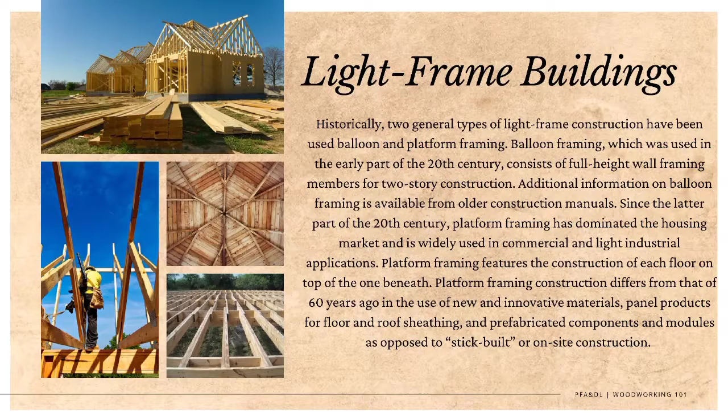Since the latter part of the 20th century, platform framing has dominated the housing market and is widely used in commercial and light industrial applications. Platform framing features the construction of each floor on top of the one beneath. It differs from the practice of 60 years ago in its use of new and innovative materials, panel products for floor and roof sheathing, and prefabricated components and modules as opposed to stick-built or on-site construction.

Foundation. Light frame buildings with basements are typically supported on cast-in-place concrete walls or concrete block walls supported by footings. This type of construction with a basement is common in northern climates.

Another practice is to have a concrete block foundation extend a short distance above ground to support a floor system over a crawl space. In southern and western climates, some buildings have no foundation; the walls are supported by a concrete slab, thus having no basement or crawl space.

Treated wood is also used for basement foundation walls. Basically, such foundations consist of wood frame wall sections with studs and plywood sheathing supported on treated wood plates, all of which are preservative treated to a specified level of protection. To distribute the load, the plates are laid on a layer of crushed stone or gravel.

Walls, which must be designed to resist the lateral loads of the backfill, are built using the same technique as conventional walls. The exterior surface of the foundation wall below grade is draped with a continuous moisture barrier to prevent direct water contact with the wall panels.

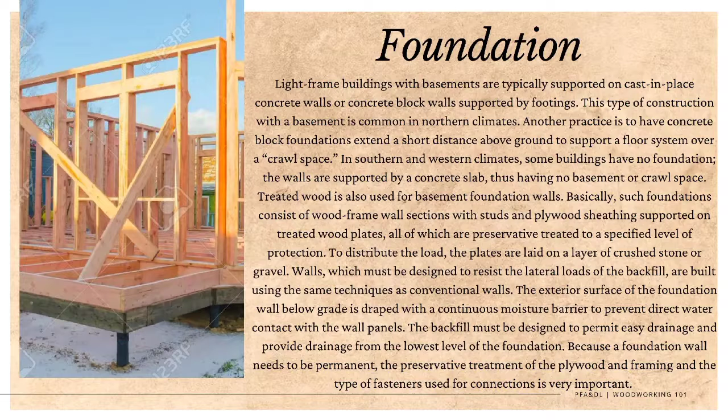The backfill must be designed to permit easy drainage and provide drainage from the lowest level of the foundation. Because the foundation wall needs to be permanent, the preservative treatment of the plywood and framing and the type of fastener used for the connection is very important.

Floor. For houses with basements, the central supporting structure may consist of wood posts on suitable footings that carry a built-up girder, frequently composed of planks the same width as the joists — standard 38 by 184 mm to 38 by 286 mm, nominal 2 by 8 inch to 2 by 12 inch — face nailed together and set on edge.

Because planks are seldom sufficiently long to span the full length of the beam, butt joints are required in the layers, staggered in the individual layers near the column support. The girder may also be a glulam beam or a steel I-beam, often supported on adjustable steel pipe columns. Similar details may be applied to a house over a crawl space.

The floor framing on a residential structure typically consists of wood joists on 400 or 600 mm, 16 or 24 inch centers, supported by a foundation wall and the center girder. Joist size depends on the anticipated loading, spacing between joists, the distance between supports or span, and the species and grade of the lumber.

Commonly used joists are standard 38 by 184 mm or 38 by 235 mm, nominal 2 by 8 inch or 2 by 10 inch lumber, prefabricated wood I-joists, or parallel chord trusses. Lumber joists typically span from 3.6 to 4.8 meters, or 12 to 16 feet.

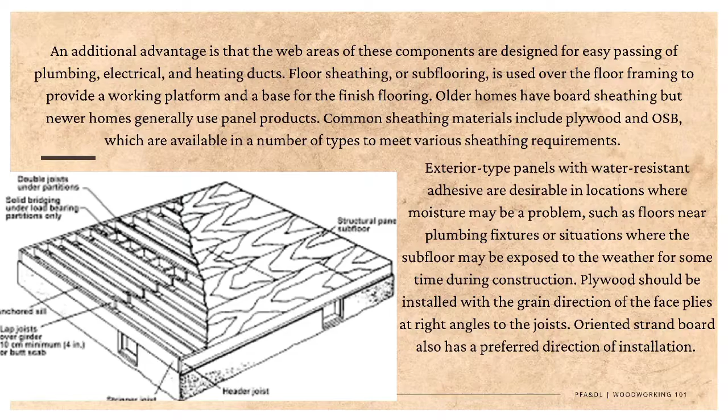Exterior walls of light frame structures are generally load bearing. They support upper floors and the roof. An exception is the gable ends of a one or two-story building.

Basically, wall framing consists of vertical studs and horizontal members, including top and bottom plates and headers or lintels over window and door openings. The studs are generally standard 38 by 89 mm, 38 by 114 mm, or 38 by 140 mm, nominal 2 by 4 inch, 2 by 5 inch, or 2 by 6 inch members, spaced between 300 and 600 mm, 12 and 24 inch on center.

The selection of the size depends on the load the wall will carry, the need for support of wall covering materials, and the need for insulation thickness in the walls.

Headers over openings up to 1.2 meters or 4 feet are often 38 by 140 millimeters or 2 by 6 inch, nailed together face to face with spacers to bring the headers flush with the face of the stud. Special headers that match the wall thickness are also available in the form of either prefabricated I-joists or structural composite lumber.

Wall framing is erected over the platform formed by the first floor joists and subfloor. In most cases, an entire wall is framed in a horizontal position on the subfloor, then tilted into place.

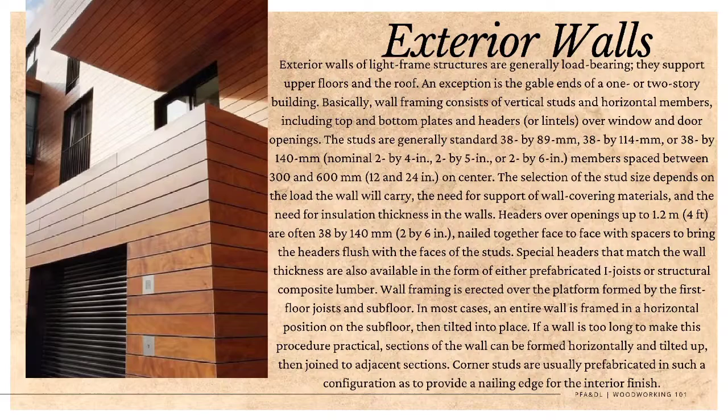Corner studs are usually prefabricated in such a configuration as to provide a nailing edge for the interior finish. Studs are sometimes doubled at the points of intersection with an interior partition to provide backup support for the interior wall finish.

Alternatively, a horizontal block is placed mid-height between exterior studs to support the partition wall. In such a case, backup clips on the partition stud are needed to accommodate the interior finish.

Upper plates are usually doubled, especially when rafters or floor joists will bear on the top plate between studs. The second top plate is added in such a way that it overlaps the first plate at corners and interior wall intersections. This provides a tie and additional rigidity between the wall, floor framing, and sill plate, which should be anchored to the foundation.

If a second story is added to the structure, the edge floor joist is nailed to the top wall plate and subfloor, and wall framing is added in the same way as the first floor.

Sheathing for the exterior wall is commonly some type of panel product. Here again, plywood or OSB may be used. Fiberboard that has been treated to impart some degree of water resistance is another option. Several types of fiberboard are available.

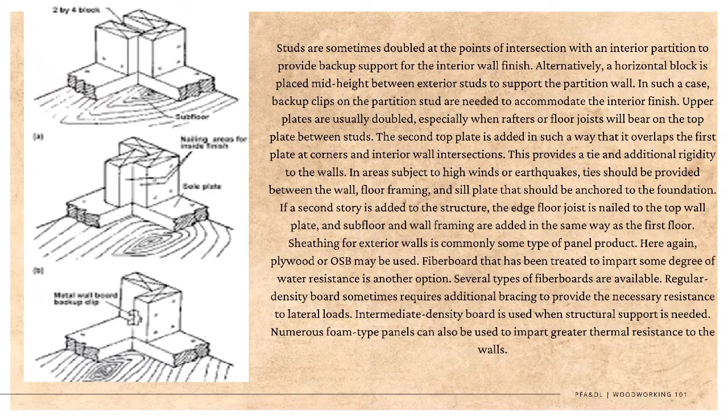Regular density boards sometimes require additional bracing to provide the necessary resistance to lateral loads. Intermediate density board is used when structural support is needed. Numerous foam-type panels can also be used to impart greater thermal resistance to the walls.

Ceiling and roof: Roof systems are generally made of either the joist and rafter system or trusses. Engineered trusses reduce on-site labor and can span greater distances without intermediate support, thus eliminating the need for interior load-carrying partitions. This provides greater flexibility in the layout of interior walls.

Prefabricated roof trusses are used to form the ceiling and sloped roofs of more than two-thirds of current light frame buildings.

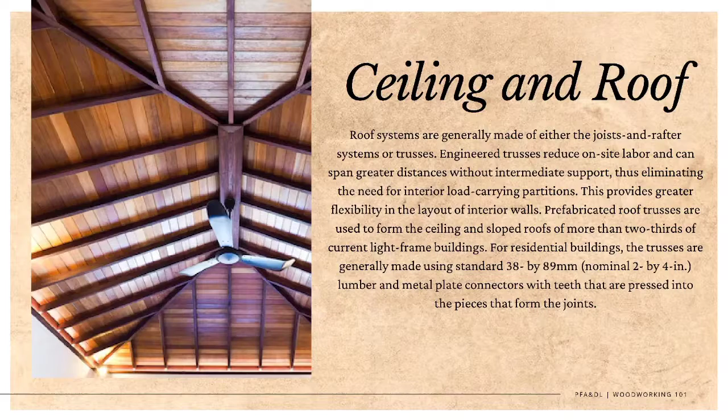For residential buildings, the trusses are generally made using standard 38 by 89 mm or nominal 2 by 4 inch lumber and metal plate connectors with teeth that are pressed into the pieces that form the joints.

Joist and rafter systems are found in most buildings constructed prior to 1950. Rafters are generally supported on the top plate of the wall and attached to a ridge board at the roof peak. However, because the rafters slope, they tend to push out the tops of the wall.

This is prevented by nailing the rafters to the ceiling joists and nailing the ceiling joists to the top wall plates. A valley or hip is formed where two roof sections meet perpendicular to each other.

A valley rafter is used to support short-length jack rafters that are nailed to the valley rafter and the ridge board. In some cases, the roof does not extend to a gable end, but is sloped from some point down to the end wall to form a hip.

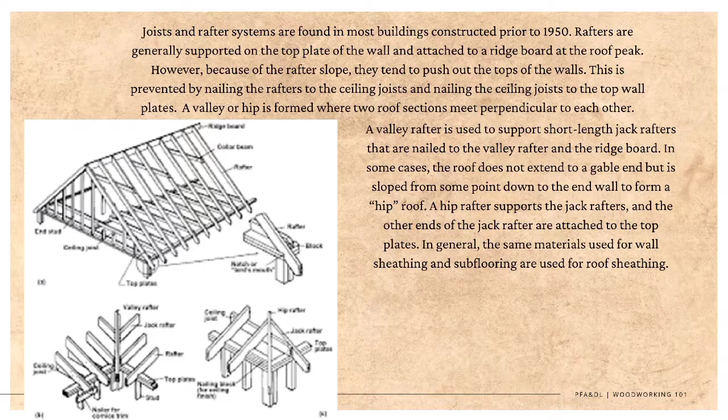Hip rafters support the jack rafters, and the other ends of the jack rafters are attached to the top plates. In general, the same materials used for the wall sheathing and subflooring are used for the roof sheathing.

Wood deck: A popular method of expanding the living area of a home is to build a wood deck adjacent to one of the exterior walls. Decks are made of preservative-treated lumber, which is generally available from local building supply dealers.

Depending upon the complexity, a deck may be built by the do-it-yourselfer. To ensure long life, acceptable appearance, and structural safety, several important guidelines should be followed.

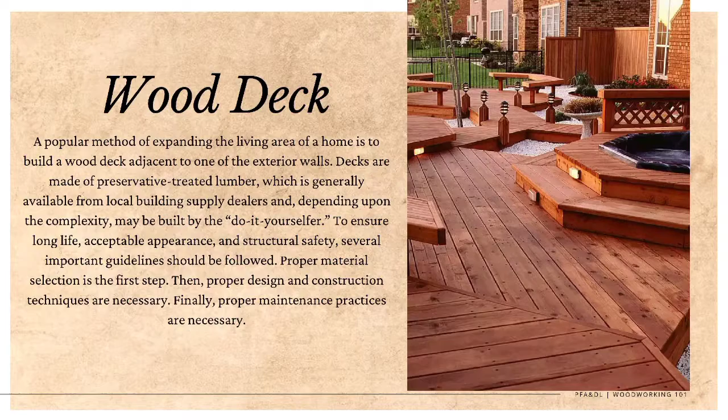Proper material selection is the first step, then proper design and construction techniques are necessary. Finally, proper maintenance practices are necessary.

Post frame and pole buildings. In post frame and pole buildings, round poles or rectangular posts serve both as the foundation and the principal vertical frame element. This type of construction was known as pole buildings, but today, with extensive use of posts, is commonly referred to as post frame construction.

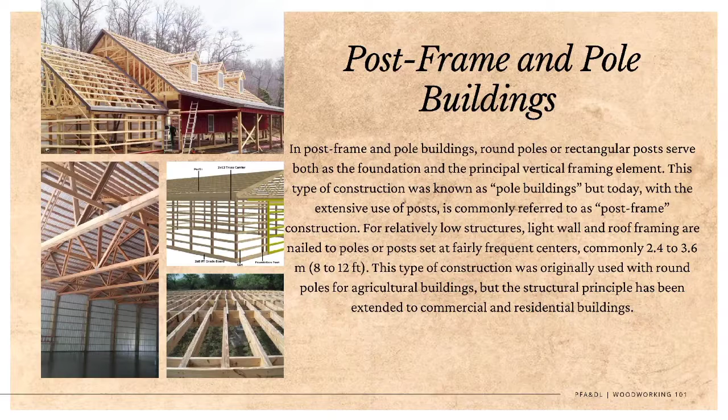For relatively low structures, light wall and roof framing are nailed to poles or posts set at fairly frequent centers, commonly 2.4 to 3.6 meters or 8 to 12 feet. This type of construction was originally used with round poles for agricultural buildings, but the structural principle has been extended to commercial and residential buildings.

Round poles present some problems for connecting frame members. These problems can be eased by slabbing the outer face of the pole. For corner poles, two faces may be slabbed at right angles. This permits better attachment of both light and heavy framing by nails or timber connectors. When the pole is left round, the outer face may be notched to provide seats for beams.

Rectangular posts are the most commonly used and may be solid sawn, glue laminated, or built up by nail laminating. Built-up posts are advantageous because only the base of the post must be preservative treated. The treated portion in the ground may have laminations of various lengths that are matched with the lengths of untreated laminations in the upper part of the post. The design of these types of posts must consider the integrity of the splice between the treated and untreated lumber.

The wall systems consist of horizontal girts, often covered with a light gauge metal that provides some degree of racking resistance. Roof trusses made with metal connectors are attached to each pole or post. Roof purlins are installed perpendicular to the trusses at spacing from 1.2 to 3.7 meters or 4 to 12 feet, with 2.4 meters or 8 feet as common spacing.

For 2.4 meter, 8 foot truss spacing, these purlins are often standard 38 by 89 mm or nominal 2 by 4 inch, spaced on 0.6 meter or 2 foot centers, and attached to either the top of the trusses or between the trusses using joist hangers.

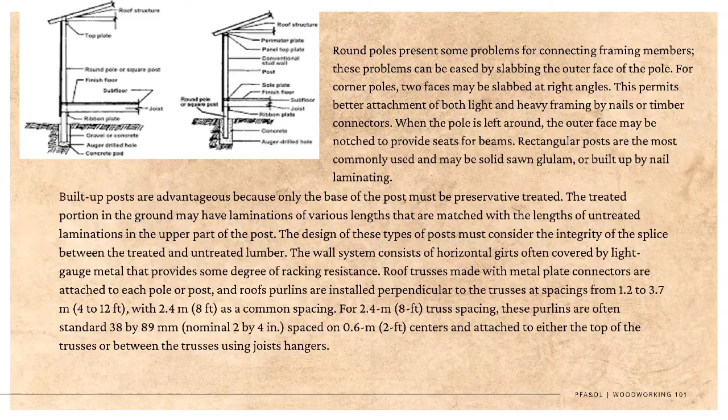Log buildings. Interest is growing in log houses, from small, simple houses for vacation use to large, permanent residences. Many US firms specialize in the design and materials for log houses. Log houses nearly always feature wall systems built from natural or manufactured logs rather than from dimensional lumber. Roof and floor systems may also be built with logs or conventional framing.

Log house companies tend to categorize log types in two systems: round and shape. In the round log system, the logs are machined to a smooth, fully rounded surface and are generally all the same diameter. In the shape system, the logs are machined to specified shapes, generally not fully round. The exterior surfaces of the logs are generally rounded, but the interior surface may be either flat or round. The interface between logs is machined to form an interlocking joint.

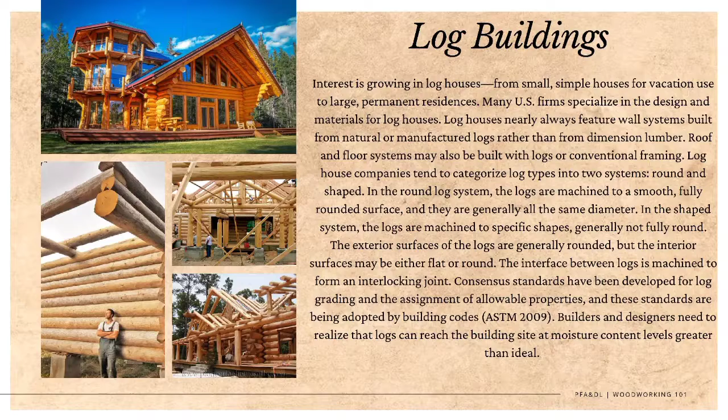Consensus standards have been developed for log grading and assignment of allowable properties, and these standards are being adopted by building codes (ASTM 2009). Builders and designers need to realize that logs can reach the building sites at moisture content levels greater than ideal.

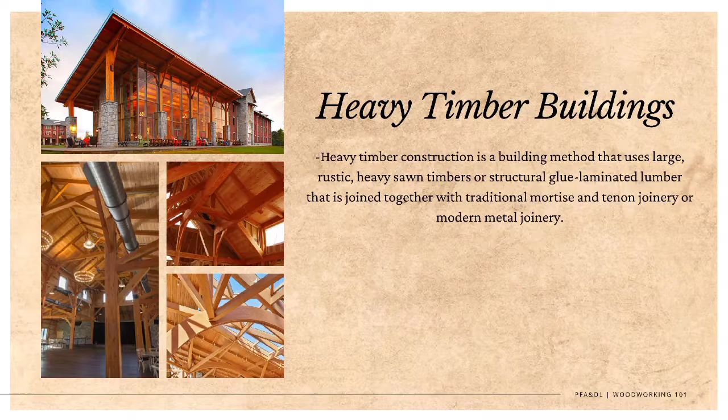Heavy timber buildings. Heavy timber construction is a building method that uses large, rustic, heavy sawn timbers or structural glue laminated lumber that is joined together with traditional mortise and tenon joinery or modern metal joinery.

Timber frame. Timber frame houses were common in early America and are enjoying some renewed popularity today. Most barns and factory buildings dating prior to the middle of the 20th century were heavy timber frames. The traditional timber frame is made of large sawn timbers, larger than 114 by 114 millimeters or 5 by 5 inches, connected to one another by hand fabricated joints, such as mortise and tenon. The construction of such a frame involves rather sophisticated joinery as illustrated.

In today's timber frame homes, a prefabricated composite sheathing panel, 1.2 by 2.4 meters or 4 by 8 feet, is frequently applied directly to the frame. This panel may consist of an inside layer of 13 millimeter or 1/2 inch gypsum, a core layer of rigid foam insulation, and an outside layer of exterior plywood or OSB. Finished siding is applied over the composite panel.

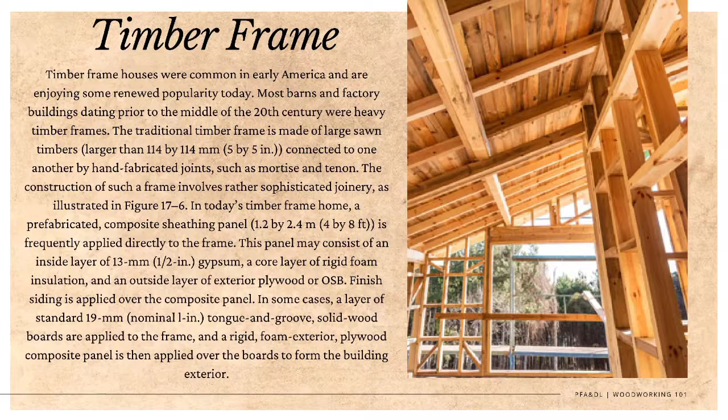In some cases, a layer of standard 19 millimeter or nominal 1 inch tongue and groove solid wood boards is applied to the frame, and a rigid foam exterior plywood composite panel is then applied over the boards to form the building exterior. Mill type construction.

Mill type construction uses timbers of large cross sections with columns spaced in a grid according to the available lengths of beam and girder timbers. The size of the timbers makes this type of construction resistant to fire. The good insulating qualities of wood, as well as the char that develops during fire, results in slow penetration of fire into large members.

Thus, the members retain a large proportion of the original load carrying capacity and stiffness for a relatively long period after the onset of fire.

To be recognized as mill-type construction, the structural element must meet specific size requirements. Columns cannot be less than standard 184 millimeter, or nominal 8 inches, in dimensions, and beams and girders cannot be less than standard 140 by 235 millimeter, or nominal 6 by 10 inch, in cross-section. Other limitations must be observed as well.

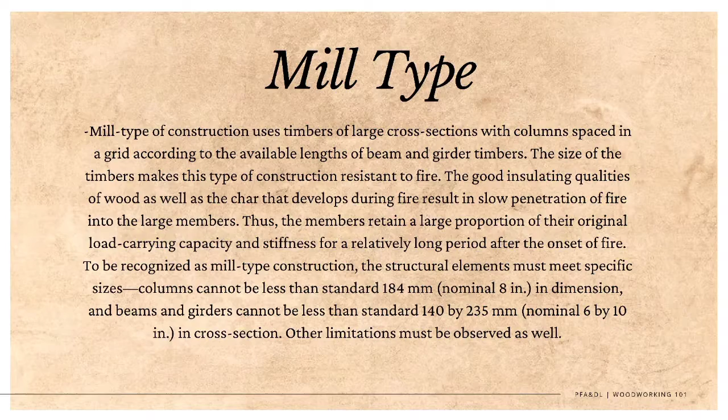Glulam beam. This system is based on supporting columns located at the corners of pre-established grids. The main glulam beams support purlins, which may be sawn timbers, glulam parallel chord trusses, or prefabricated wood I-joists. These purlins, normally at 2.4 meter or 8 feet centers, support pre-framed structural panels.

The basic unit of the pre-framed system is 1.2 by 2.4 meters, or 4 by 8 feet. Structural panels are nailed to standard 38 by 89 millimeter or 38 by 140 millimeter, nominal 2 by 4 inch or 2 by 6 inch, stiffeners, or sub-purlins. These stiffeners run parallel to the 2.4 meter or 8 feet dimension of the structural panel.

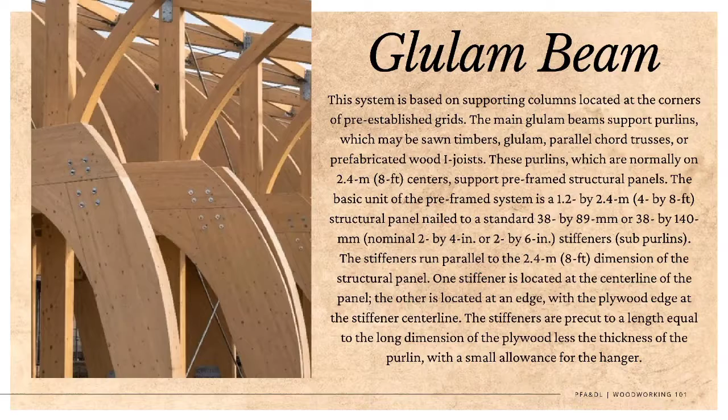One stiffener is located at the center line of the panel. The other is located at the edge, with the plywood edge at the stiffener center line. The stiffeners are pre-cut to a length equal to the long dimension of the plywood, less the thickness of the purlin, with a small allowance for the hanger.

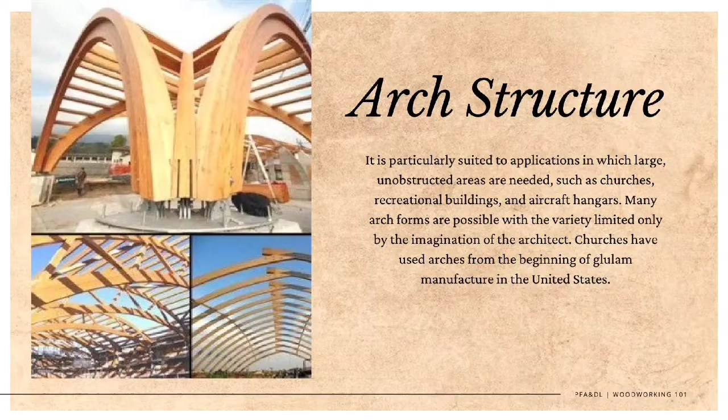Arch structures. These are particularly suited to applications in which large, unobstructed areas are needed, such as churches, recreational buildings, and aircraft hangars. Many arch forms are possible, with a variety limited only by the imagination of the architects. Churches have used arches from the beginning of glulam manufacture in the United States.

Dome. Radial rib domes consist of curved members extending from the base ring, or tension ring, to a compression ring at the top of the dome, along with other ring members at various elevations between the tension and compression rings. The ring members may be curved or straight.

If they are curved to the same radius as the rib and have their centers at the center of the sphere, the dome will have a spherical surface. If the ring members are straight, the dome will have an umbrella look. Connections between the ribs and other ring members are critical because of the high compressive loads in the ring members.

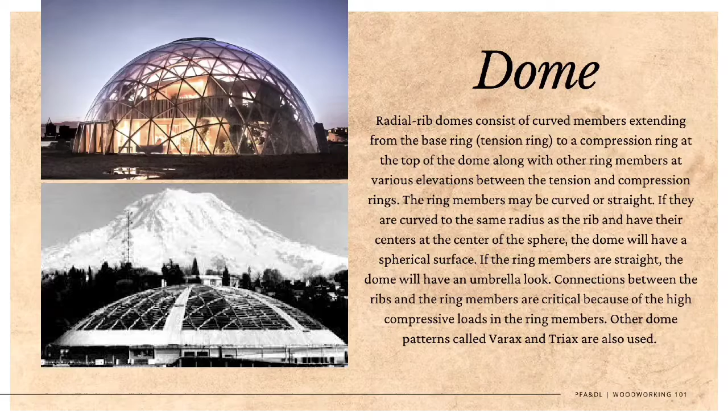Other dome patterns, called Varax and Triax, are also used.

Timber bridges. Prior to the 20th century, timber was the major material used for both highway and railroad bridges. The development of steel and reinforced concrete provided other options, and these have become the major bridge building materials. However, the U.S. inventory does contain a substantial number of timber bridges, many of which continue to carry loads beyond their design life. A recent initiative in the United States has focused research and technology transfer efforts on improving the design and performance of timber bridges.

As a result, hundreds of timber highway bridges were built across the United States during the past several years, many using innovative designs and materials.

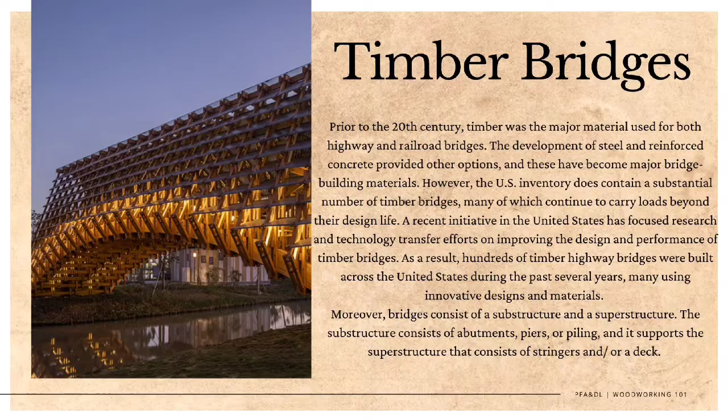Moreover, bridges consist of a substructure and a superstructure. The substructure consists of abutments, piers, or piling, and it supports the superstructure that consists of stringers and/or a deck.

Log stringer. A simple bridge type that has been used for centuries consists of one or more logs used to span the opening. Several logs may be laid side by side and fastened together. The log stringer bridge has been used to access logging areas and is advantageous when adequate sized logs are available and the bridge is needed for only a short time. Unless built with durable species, the lifespan of a log stringer bridge is usually limited to less than 10 years.

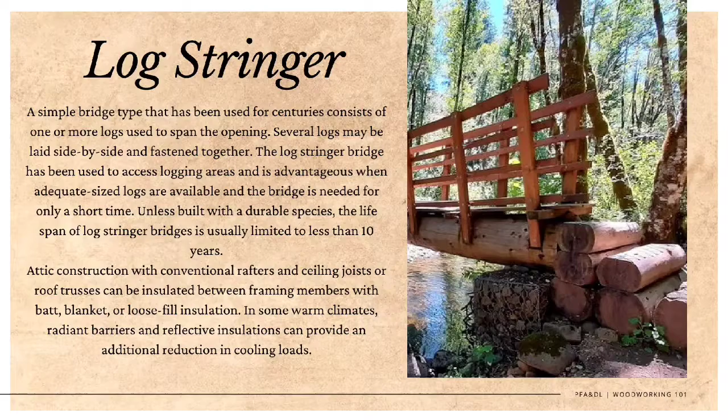Attic construction with conventional rafters and ceiling joists, or roof trusses, can be insulated between framing members with batt, blanket, or loose fill insulation. In some warm climates, radiant barriers and reflective insulation can provide an additional reduction in cooling loads.

Sawn lumber. Several types of bridges can be built with sawn lumber. Even though the span is usually limited to about 9 meters or 30 feet, because of the limited size of the lumber available, this span length entails the majority of timber bridges in the United States.

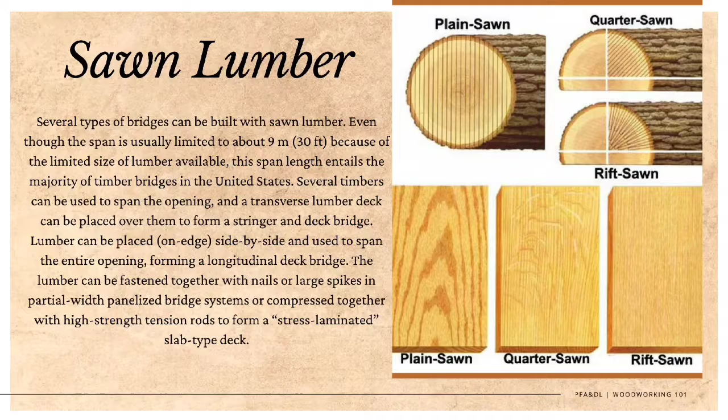Several timbers can be used to span the opening, and a transverse lumber deck can be placed over them to form a stringer and deck bridge. Lumber can be placed on edge, side by side, and used to span the entire opening, forming a longitudinal deck bridge. The lumber can be fastened together with nails or large spikes in partial width panelized bridge systems, or compressed together with high-strength tension rods to form a stress-laminated slab-type deck.

Glulam. Structural glued laminated, or glulam, timber greatly extends the span capabilities of the same types of bridges described in the previous paragraph. Glulam stringers placed 0.6 to 1.8 meters on center can support a glulam deck system and result in a span of 12 to 30 meters or more. Using glulam panels to span the opening results in a longitudinal deck system, but this is usually limited to about 9 meter spans.

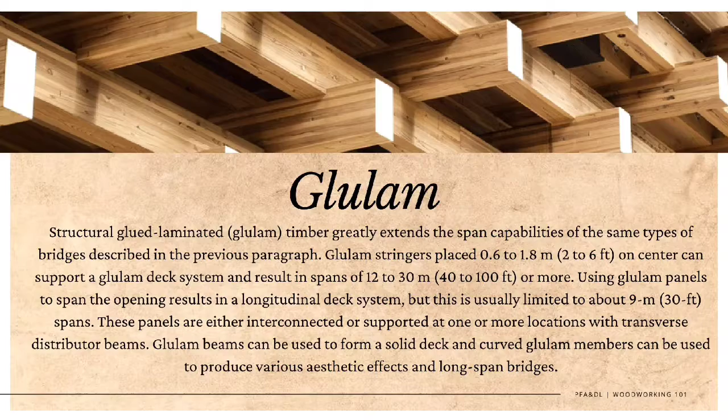These panels are either interconnected or supported at one or more locations with transverse distributor beams. Glulam beams can be used to form a solid deck, and curved glulam members can be used to produce various aesthetic effects and long-span bridges.

Structural composite lumber. Two types of structural composite lumber, or SCL, laminated veneer and oriented strand, are beginning to be used to build timber bridges. Most of the same type of bridges built with either solid sawn or glulam timber can be built with SCL.

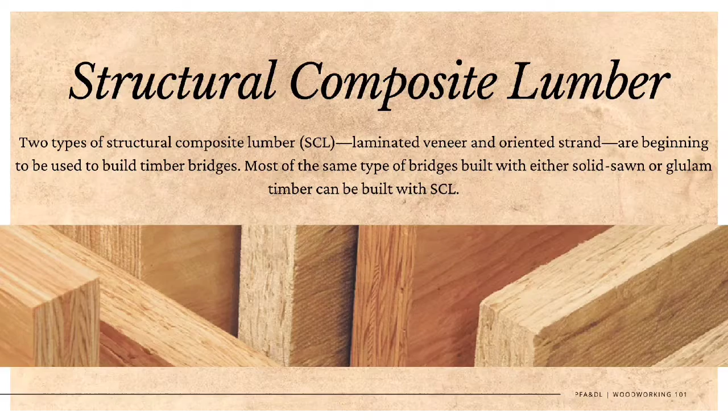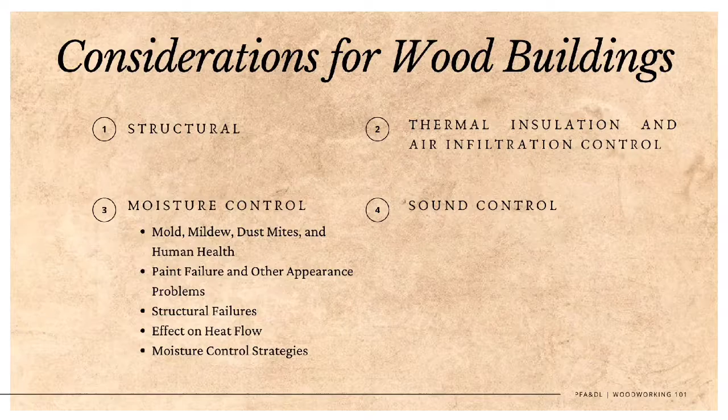Considerations for wood buildings. Many factors must be considered when designing and constructing wood buildings, including structural, insulation, moisture, and sound control. The following section provides a brief description of the design considerations of these factors. Structural: the structural design of any building consists of combining the prescribed performance requirements with the anticipated loading. One major performance requirement is that there is an adequate margin of safety between the structure's ultimate capacity and the maximum anticipated loading.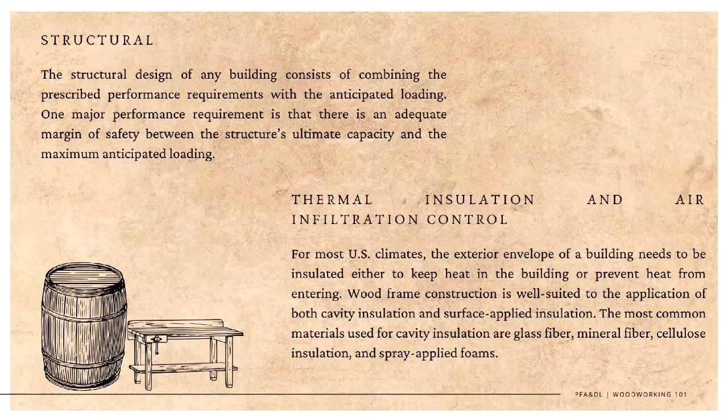Thermal insulation and air infiltration control. For most U.S. climates, the exterior envelope of a building needs to be insulated either to keep heat in the building or prevent heat from entering. Wood frame construction is well suited to application of both cavity insulation and surface applied insulation. The most common materials used for cavity insulation are glass fiber, mineral fiber, cellulose insulation, and spray applied foams.

Moisture control. Moisture sources for buildings can be broadly classified as follows: surface runoff of precipitation from land areas, groundwater or wet soil, precipitation or irrigation water that falls on the building, indoor humidity, outdoor humidity, moisture from use of wet building materials or construction under wet conditions, and errors, accidents, and maintenance problems associated with indoor plumbing.

Water can change phase and can be transported over space by various mechanisms. Moisture accumulation within a building or within parts of a building can affect human comfort and health, influence building durability, and necessitate maintenance and repair activities. Furthermore, moisture accumulation in the building's thermal envelope is also likely to influence the building's energy performance.

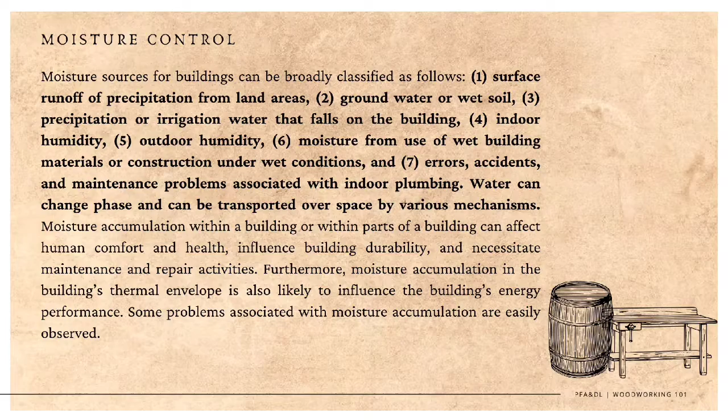Some problems associated with moisture accumulation are easily observed: mold, mildew, dust mites, and human health effects. Mold and mildew in buildings are offensive, and the spores can cause respiratory problems and allergic reactions in humans. Mold and mildew will grow on most surfaces if the relative humidity at a surface is above a critical value and the surface temperatures are conducive to growth. The longer the surface remains above this critical relative humidity level, the more likely mold will appear.

Paint failure and other appearance problems. Moisture trapped behind paint films may cause failure of the paint. Water or condensation may also cause streaking or staining. Excessive swings in moisture content of wood-based panels or boards may cause buckling or warp. Excessive moisture in masonry and concrete can produce efflorescence, a white powdery area, or lines.

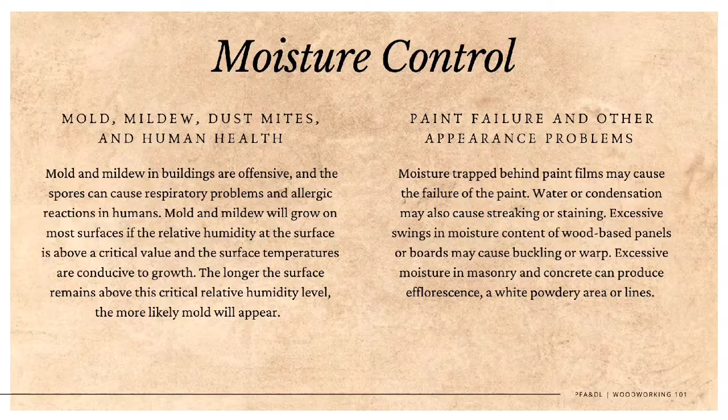Structural failures caused by decay of wood are rare but have occurred. Decay generally requires wood moisture content equal to or greater than fiber saturation, and temperatures between 10 and 43 degrees Celsius. Wood moisture content levels above fiber saturation are only possible in green lumber or by absorption of liquid water from condensation, leaks, groundwater, or other saturated materials in contact with the wood. To maintain a safety margin, 20% moisture content is sometimes used during field inspection as a maximum allowable level.

Effect on heat flow. Moisture in the building envelope can significantly degrade the thermal performance of most insulation materials, specifically the thermal resistance of fibrous insulation and open cell foams. The degradation is most pronounced when daily temperature reversals across the insulation drive moisture back and forth through the insulation.

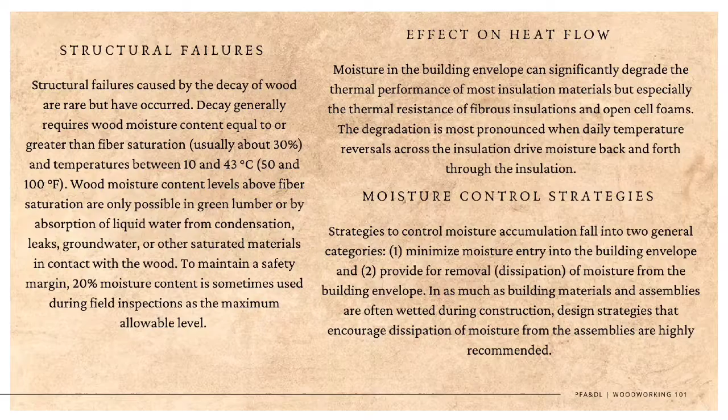Moisture control strategies. Strategies to control moisture accumulation fall into two general categories: first, minimize moisture entry into the building envelope, and second, provide for removal of moisture from the building envelope. Inasmuch as building materials and assemblies are often wetted during construction, design strategies that encourage dissipation of moisture from the assemblies are highly recommended.

Sound control. An important design consideration for residential and office buildings is the control of sound that either enters the structure from outside or is transmitted from one room to another. Wood frame construction can achieve levels of sound control equal to or greater than more massive construction, such as concrete. However, to do so requires designing for both airborne and impact noise insulation.

Airborne noise insulation is the resistance to transmission of airborne noises, such as traffic or speech, either through or around an assembly such as a wall. Noises create vibration on the structural surface that they contact, and the design challenge is to prevent this vibration from reaching and leaving the opposite side of the structural surface. Sound transmission class, or STC, is the rating used to characterize airborne noise insulation. A wall system with a high STC rating is effective in preventing the transmission of sound.

Impact noise insulation is the resistance to noise generated by footsteps or dropping objects. It is generally addressed at floor-ceiling assemblies in multifamily dwellings. Impact Insulation Class, or IIC, is the rating used to characterize the impact noise insulation of an assembly. Both the character of the flooring material and the structural details of the floor influence the IIC rating.